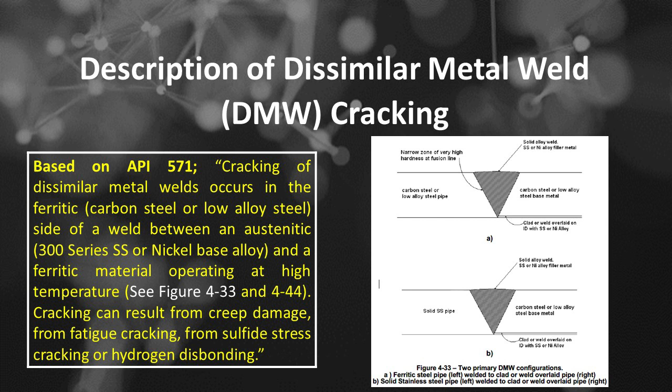Dissimilar metal weld, or DMW, cracking damage refers to a failure mechanism that can occur at the junction of two different types of metals that have been welded together. This issue is particularly prevalent in applications involving high-temperature and high-pressure environments, such as in power plants, refineries, and nuclear facilities.

Characteristics of dissimilar metal weld cracking. Number 1 is material differences. Dissimilar metal weld often involves joining a ferrous metal, such as carbon steel or low alloy steel, with a non-ferrous metal, such as stainless steel or nickel alloys. The differing thermal expansion coefficients, mechanical properties, and chemical compositions of these metals can lead to stress concentrations.

Number 2 is cracking locations. Dissimilar metal weld, or DMW, cracking typically occurs at or near the heat-affected zone, HAZ, or the weld itself, where the microstructure has been altered due to the intense heat from the welding process. Cracking can manifest as transverse cracks, longitudinal cracks, or underbead cracks.

Number 3 is mechanisms of cracking, such as the following. The first is thermal stresses. Discrepancies in cooling rates between the two metal types can induce residual stresses, leading to cracking.

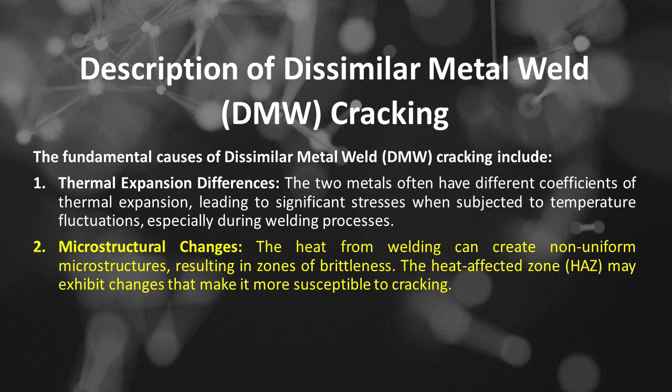Number 2 is microstructural changes. The heat from welding can create non-uniform microstructures, resulting in zones of brittleness. The heat-affected zone, or HAZ, may exhibit changes that make it more susceptible to cracking.

Number 3 is residual stresses. Welding introduces residual stresses in the joint area due to the concentrated heating and rapid cooling involved in the welding process. These stresses can further exacerbate cracking, especially in the presence of tensile loads.

Number 4 is hydrogen embrittlement, often due to the presence of hydrogen in the weld area, exacerbated by the different microstructures of the adjacent metals. Number 5 is composition differences. The difference in alloying elements between the two metals can result in the formation of hard, brittle phases within the weld metal or at the interface, which can initiate cracks.

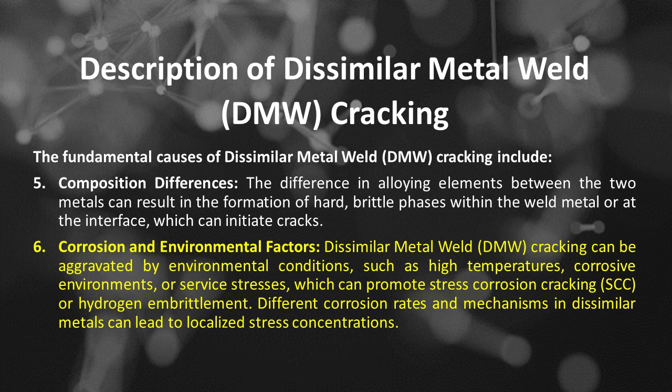Number 6 is corrosion and environmental factors. Dissimilar metal weld, or DMW, cracking can be aggravated by environmental conditions, such as high temperatures, corrosive environments, or service stresses, which can promote stress corrosion cracking, or SCC, or hydrogen embrittlement. Different corrosion rates and mechanisms in dissimilar metals can lead to localized stress concentrations.

The occurrence of dissimilar metal weld, or DMW, cracking is a critical concern in industries like power generation, oil and gas, and petrochemical sectors, where welded joints are subject to rigorous service conditions. It can lead to significant safety hazards, operational downtime, and costly repairs if not properly managed.

Preventive measures include careful selection of welding materials, precise control of welding parameters, and thorough post-weld heat treatments to relieve residual stresses and minimize the likelihood of cracking.

Regular inspection and monitoring of weld integrity are also essential to detect dissimilar metal weld, or DMW, cracking early and address any potential issues proactively.

Dissimilar metal weld, or DMW, affected materials based on API 571: the most common are ferritic materials such as carbon steel and low-alloy steels that are welded to austenitic stainless steels, as well as any material combinations with widely differing thermal expansion coefficients. DMW cracking is a concern in industries that involve welding of different metals, particularly in pressure vessels, piping, and structural components.

The affected materials in dissimilar metal weld, or DMW, cracking typically involve a combination of metal types, often characterized by differences in mechanical properties, thermal expansion coefficients, and metallurgical characteristics. Key affected materials that may be involved include: Number 1, carbon steel.

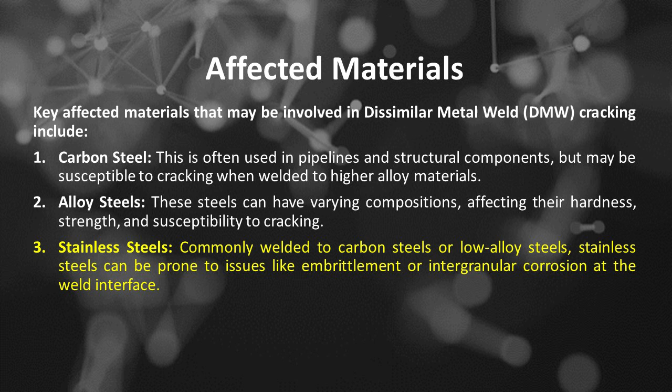Commonly welded to carbon steels or low-alloy steels, stainless steels can be prone to issues like embrittlement or intergranular corrosion at the weld interface. Number 4 is nickel alloys. These are sometimes used in high-temperature or corrosive environments but may create challenges when welded to lower alloy steels due to differing thermal and mechanical properties.

Number 5 is copper alloys. The welding of copper to carbon steel or nickel alloys can lead to significant issues due to differing thermal expansion and conductivity, potentially resulting in cracking.

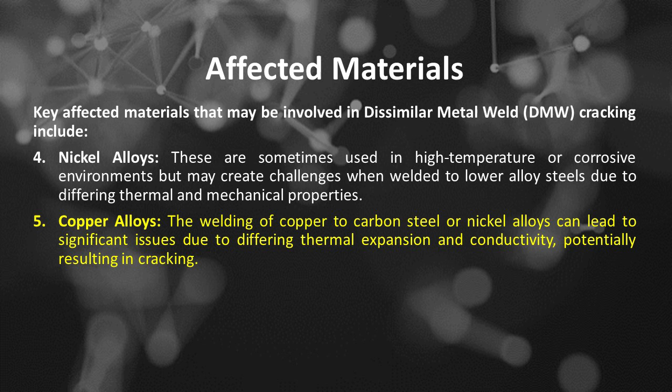Number 6 is cast irons. When cast iron is joined to steel, the brittle nature of cast iron can result in cracking if not properly handled in the welding process.

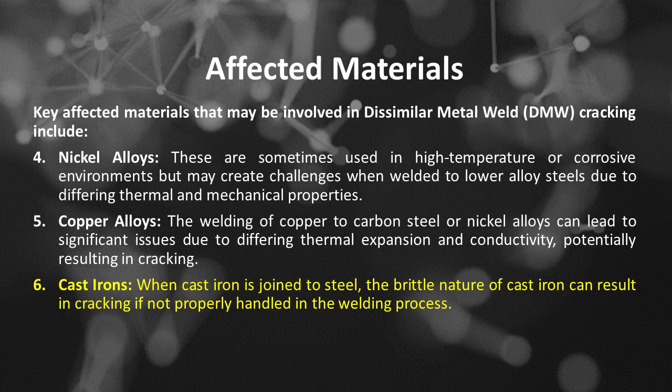Number 7 is welding filler metals. The choice of filler metal is crucial as it must match or be compatible with both base materials, and inappropriate selection can lead to weld cracking due to differences in thermal properties or hydrogen susceptibility.

Number 8 is other dissimilar metals. Various combinations of metals may also lead to specific cracking mechanisms due to differences in weldability and thermal behavior.

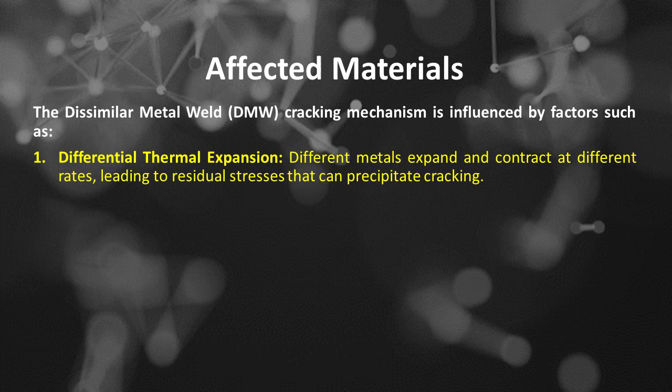The dissimilar metal weld, or DMW, cracking mechanism is influenced by factors such as: Number 1 is differential thermal expansion. Different metals expand and contract at different rates, leading to residual stresses that can precipitate cracking.

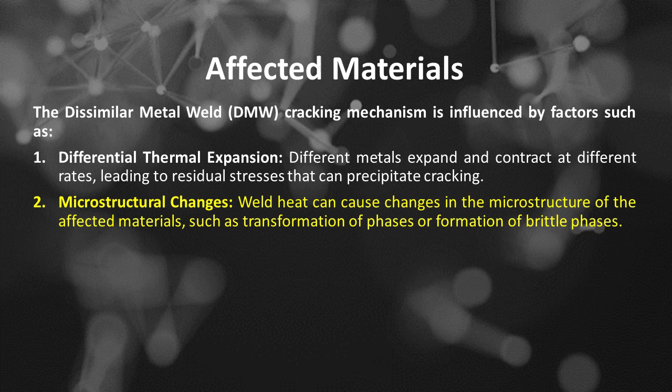Number 2 is microstructural changes. Weld heat can cause changes in the microstructure of the affected materials, such as transformation of phases or formation of brittle phases. Number 3 is strain aging.

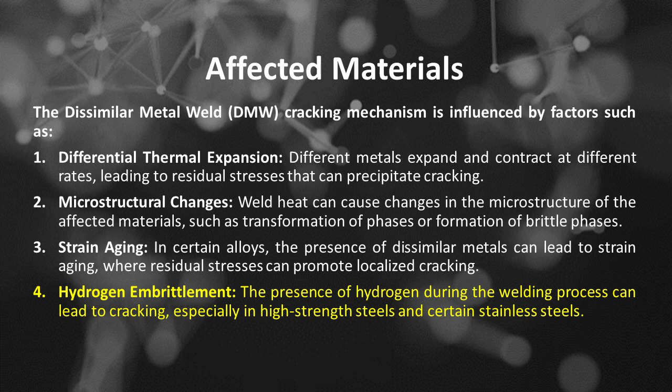In certain alloys, the presence of dissimilar metals can lead to strain aging, where residual stresses can promote localized cracking. Number 4 is hydrogen embrittlement. The presence of hydrogen during the welding process can lead to cracking, especially in high-strength steels and certain stainless steels.

Number 5 is thermal fatigue. Cyclic thermal loading can be more pronounced at the interface of dissimilar metals, leading to fatigue cracking over time.

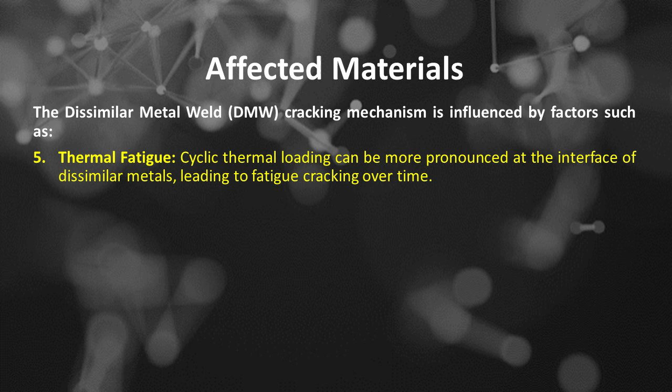Addressing dissimilar metal weld, or DMW, cracking involves careful selection of welding procedures, filler materials, and post-weld heat treatments, as well as thorough inspection and testing to ensure the integrity of the joints.

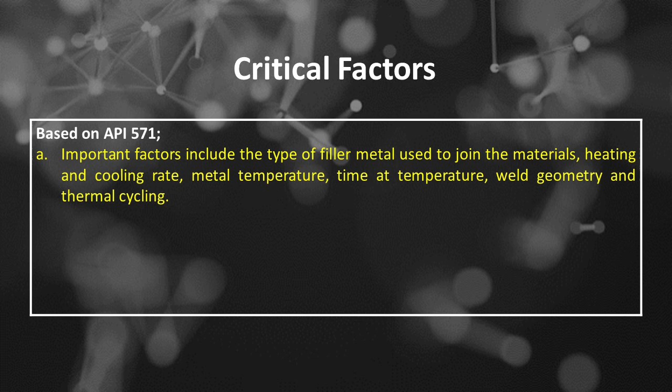Dissimilar metal weld, or DMW, cracking critical factors based on API 571. Important factors include the type of filler metal used to join the materials, heating and cooling rate, metal temperature, time at temperature, weld geometry and thermal cycling.

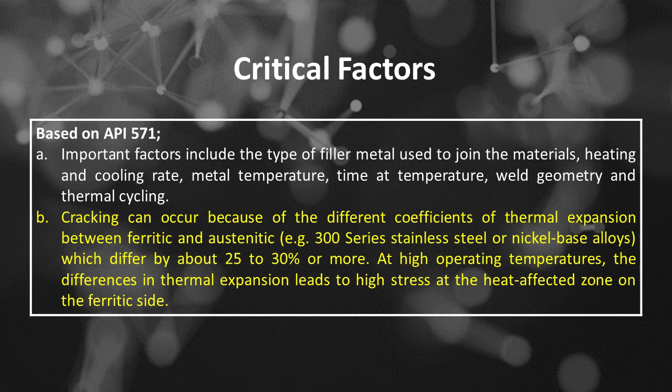The second factor is that cracking can occur because of the different coefficients of thermal expansion between ferritic and austenitic materials, such as 300 series stainless steel or nickel base alloys, which differ by about 25 to 30% or more. At high operating temperatures, the differences in thermal expansion leads to high stress at the heat-affected zone on the ferritic side.

The third factor is as the operating temperature increases, differential thermal expansion between the metals results in increasing stress at the weldment, particularly if a 300 series stainless steel weld metal is used. Ferritic/austenitic joints can generate significant thermal expansion and thermal fatigue stresses at temperatures greater than 510 degrees Fahrenheit, or 260 degrees Celsius.

The fourth factor is thermal cycling aggravates the problem. Stresses during startup and shutdown can be significant. The fifth factor is stresses acting on the weldment are significantly higher when an austenitic stainless steel filler metal is used.

A nickel base filler metal has a coefficient of thermal expansion that is closer to carbon steel, resulting in significantly lower stress at elevated temperatures.

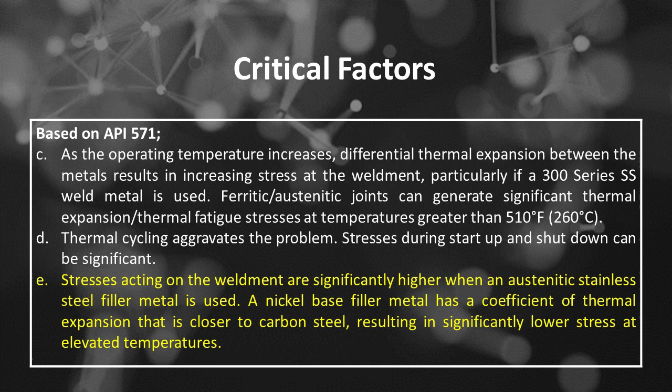The sixth factor is for dissimilar welds that operate at elevated temperatures, the problem is aggravated by the diffusion of carbon out of the heat-affected zone of the ferritic material and into the weld metal. The loss of carbon reduces the creep strength of the ferritic material heat-affected zone, thereby increasing the cracking probability.

The temperature at which carbon diffusion becomes a concern is above 800 degrees Fahrenheit to 950 degrees Fahrenheit, or 427 degrees Celsius to 510 degrees Celsius, for carbon steels and low alloy steels, respectively.

See Figure 4:35, a high magnification photomicrograph of a dissimilar metal weld, or DMW, joining a ferritic alloy, SA213T22, used in high temperature service. Creep cracks, or black specks, can be observed in the ferritic alloy heat-affected zones.

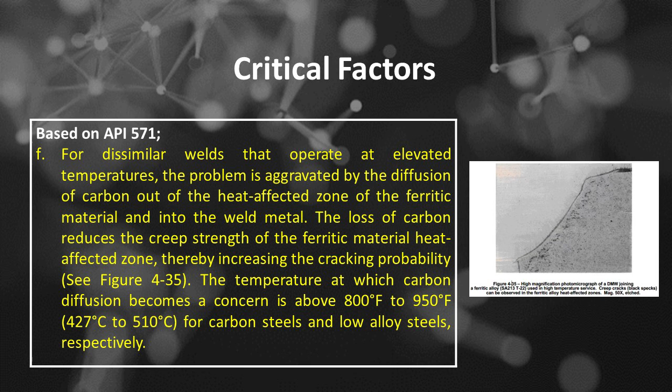Mag. 50X, etched. Dissimilar metal welds on a ferritic steel made with a 300 series SS weld metal or a nickel-based filler metal result in a narrow region, a mixed zone, of high hardness at the toe of the weld, near the fusion line on the ferritic steel side.

These high hardness zones render the material susceptible to various forms of environmental cracking such as sulfide stress cracking or hydrogen stress cracking. PWHT of the weldment will not prevent environmental cracking if the weld is exposed to wet H2S conditions.

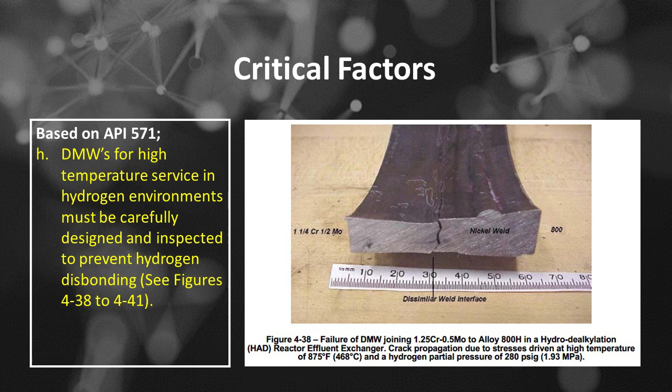Failure of dissimilar metal welds joining 1.25 Cr 0.5 Mo to alloy 800H in a hydrodealkylation, or HAD, reactor effluent exchanger. Crack propagation due to stresses driven at high temperature of 875 degrees Fahrenheit, or 468 degrees Celsius, and a hydrogen partial pressure of 280 psig, or 1.93 MPa.

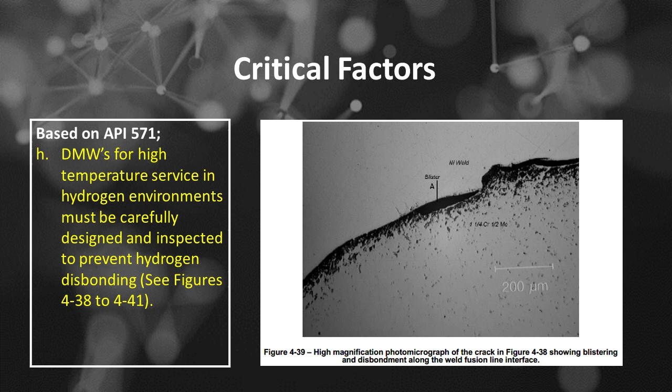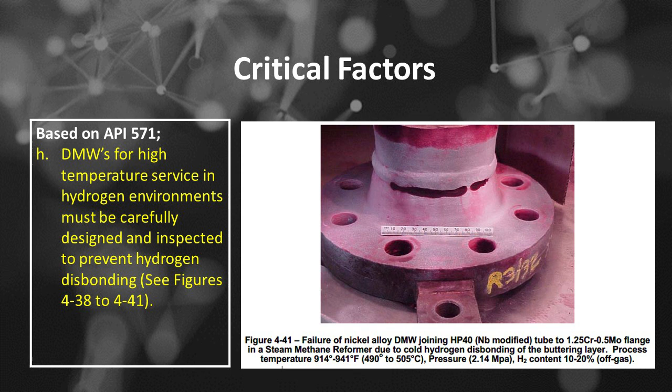See Figure 4:41, failure of a nickel alloy DMW joining HP40, NB modified, tube to 1.25 Cr 0.5 Mo flange in a steam methane reformer due to cold hydrogen disbonding of the buttering layer. Process temperature 914 to 941 degrees Fahrenheit, or 490 to 505 degrees Celsius, pressure 2.14 MPa, H2 content 10 to 20%, off gas.

Dissimilar metal weld, DMW, cracking is a well-documented failure mechanism that can occur at the interface between different types of metals, particularly in structures such as piping in power plants, chemical plants, and oil and gas facilities. Here are some critical factors associated with dissimilar metal weld cracking.

Number 1 is material properties, such as the following. The first is mechanical properties. The yield strength, ductility, and toughness of the parent metals can significantly affect the cracking potential. Dissimilar metals often have differing mechanical properties that can interact adversely.

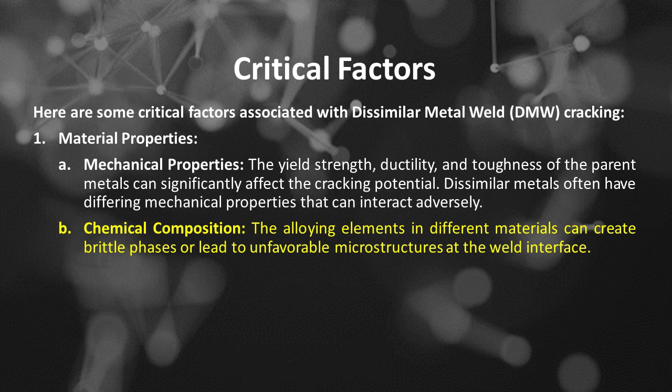The second is chemical composition. The alloying elements in different materials can create brittle phases or lead to unfavorable microstructures at the weld interface.

Number 2 is welding parameters, such as the following. The first is heat input. The amount of heat introduced during welding can influence the cooling rates and microstructures of the weld and heat-affected zones, HAZ. Higher heat inputs can lead to larger grain sizes and potentially more brittle phases forming.

The second is welding procedure. The technique and processes used, including the type of filler material, can affect the metallurgical characteristics of the weld.

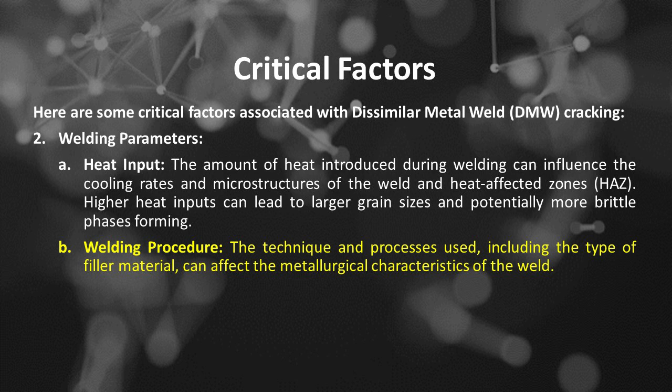Number 3 is thermal stress and residual stress, such as the following. The first is thermal cycles. The thermal expansion and contraction during and after welding can induce residual stresses, which may drive cracking.

The second is brittle phase formation. The localized thermal effects can lead to the formation of brittle intermetallic compounds, which are more susceptible to cracking under stress. Number 4 is microstructural factors, such as the following.

The first is weld microstructure. The interaction between different microstructures at the fusion boundary can lead to weak spots. For example, austenitic stainless steel welded to carbon steel might form brittle intermetallic compounds like Fe-Cr or Ni-Fe phases.

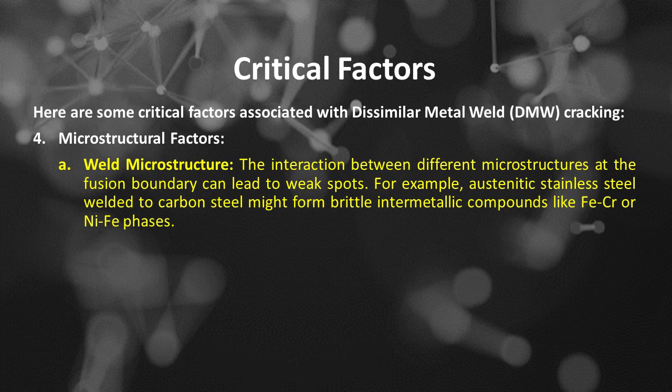The second factor is heat-affected zone, or HAZ, properties. The properties of the HAZ can significantly influence the likelihood of cracking, especially if embrittlement occurs.

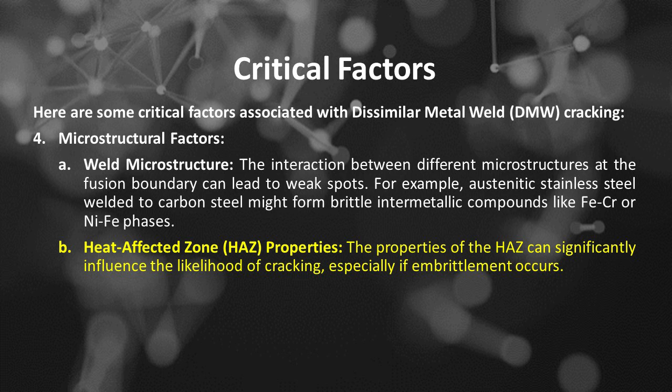Number 5 is environmental conditions, such as corrosive environments. Dissimilar metal welds, or DMWs, may be more susceptible to stress corrosion cracking, or SCC, if they operate in hostile environments, like high temperature or corrosive media.

The second is operating temperature and pressure. Elevated temperatures can enhance diffusion rates, accelerating embrittlement processes.

Number 6 is design factors, such as geometric constraints. The design of the weld joint, including the fit-up and joint design, can influence stress concentrations and the potential for cracking. The second is service conditions.

The operational conditions, including thermal cycling, mechanical loading, and chemical exposure, can play a significant role in the initiation and propagation of cracks. Number 7 is post-weld heat treatment, or PWHT.

Properly designed post-weld heat treatment, PWHT, can help relieve residual stresses and transform microstructures to enhance ductility, thereby reducing the risk of cracking.

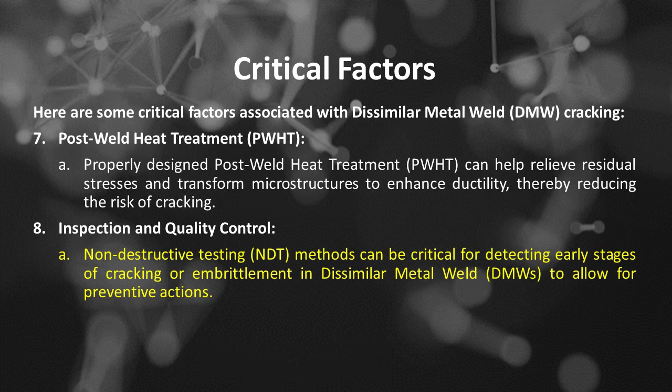Number 8 is inspection and quality control. Non-destructive testing, or NDT, methods can be critical for detecting early stages of cracking or embrittlement in dissimilar metal welds, DMWs, to allow for preventive actions.

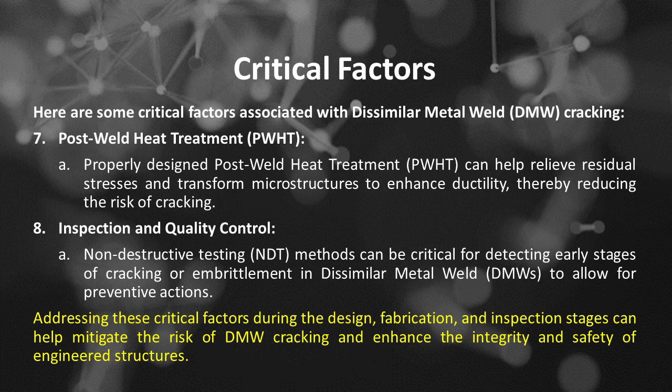Addressing these critical factors during the design, fabrication, and inspection stages can help mitigate the risk of DMW cracking and enhance the integrity and safety of engineered structures.

Dissimilar metal weld damage mechanisms affect units or equipment based on API 571. First, dissimilar metal welds are utilized in special applications in refineries and other process plants. Examples of dissimilar metal welds, or DMWs, include welds used to join clad pipe in locations such as

transitions in hydroprocessing reactor outlet piping from overlaid low alloy CrMo nozzles or piping to solid 300 series stainless steel pipe.

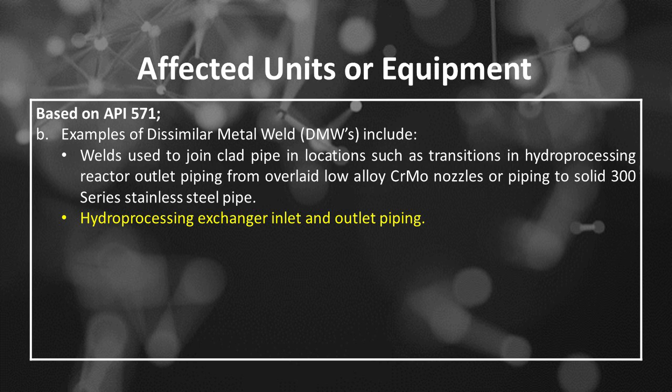Hydroprocessing exchanger inlet and outlet piping. Alloy transitions inside fired heaters, such as 9Cr to 317L in a crude furnace.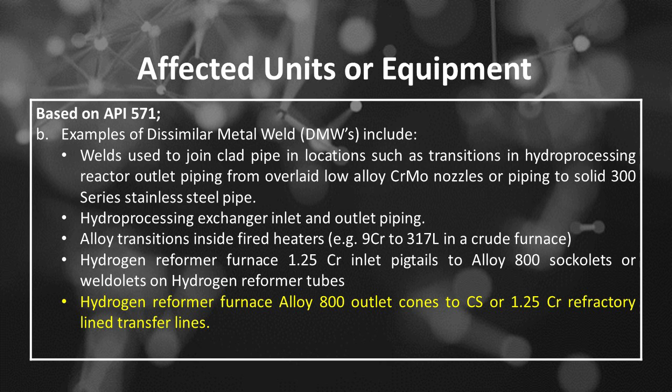Hydrogen reformer furnace 1.25 CR inlet pigtails to alloy 800 sockolets or weldolets on hydrogen reformer tubes. Hydrogen reformer furnace alloy 800 outlet cones to CS or 1.25 CR refractory-lined transfer lines.

Alloy transitions inside fired heaters, e.g., 9CR to 317L in a crude or vacuum furnace.

Welds joining clad pipe sections to themselves or to unclad carbon or low alloy steel pipe, such as alloy C276 clad CS piping in a crude unit overhead system.

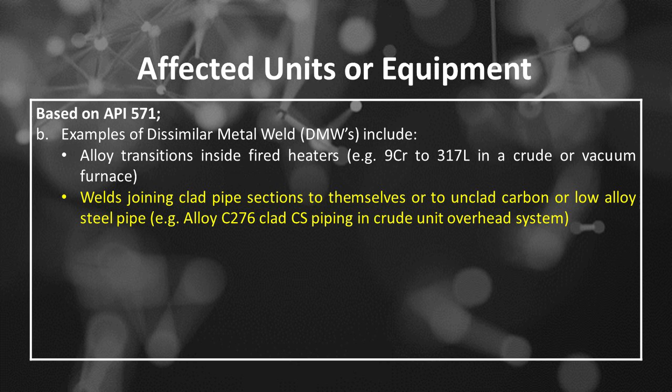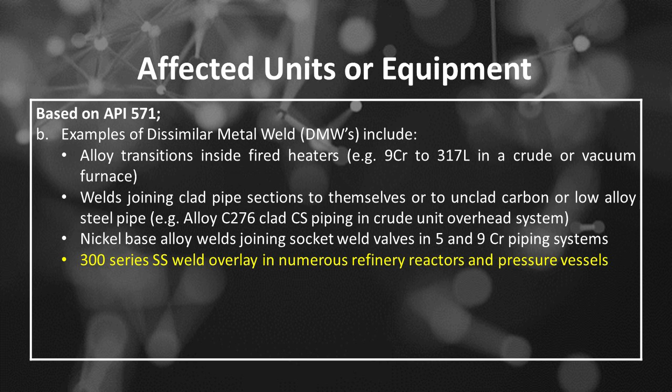Nickel base alloy welds joining socket weld valves in 5 and 9 CR piping systems. 300 series SS weld overlay in numerous refinery reactors and pressure vessels. Similar dissimilar metal welds, or DMWs, have been used in FCCU reactors and regenerator vessels and in coker units.

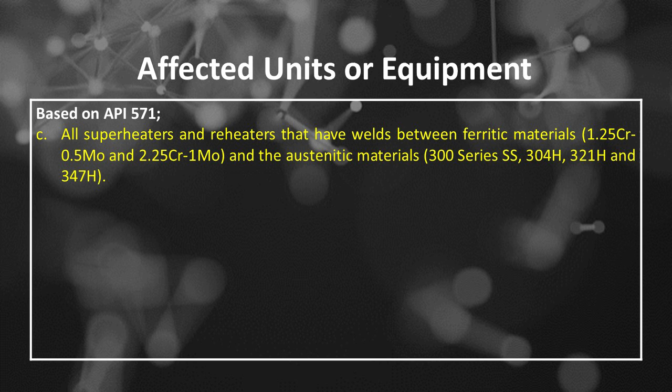The third example is all superheaters and reheaters that have welds between ferritic materials, 1.25 CR 0.5 MO and 2.25 CR 1 MO, and the austenitic materials, 300 series SS, 304H, 321H and 347H.

Dissimilar metal weld, DMW, cracking is a significant damage mechanism primarily associated with the welding of dissimilar metals, such as those typically found in power generation and chemical processing industries.

The most affected units or equipment typically include: number 1, piping systems. These often consist of carbon steel or low alloy steel connected to stainless steel components. The welded joints between dissimilar metals can be prone to cracking.

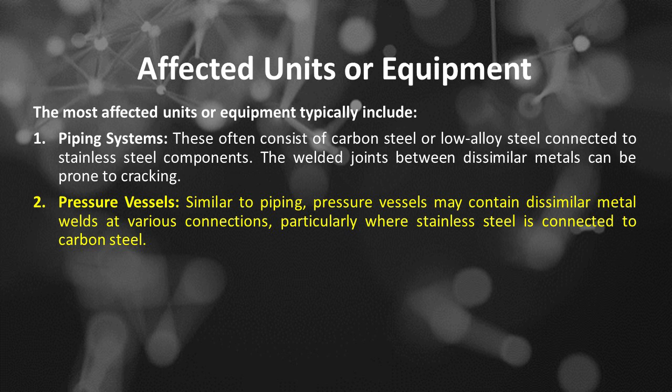Number 2 is pressure vessels. Similar to piping, pressure vessels may contain dissimilar metal welds at various connections, particularly where stainless steel is connected to carbon steel. Number 3 is heat exchangers.

The joints between different metal types in heat exchangers, especially those using stainless steel and carbon steel, can be susceptible to dissimilar metal weld, DMW, cracking. Number 4 is boilers. Dissimilar welds can occur in boiler components where different materials are used, leading to cracking issues under high temperatures and pressures.

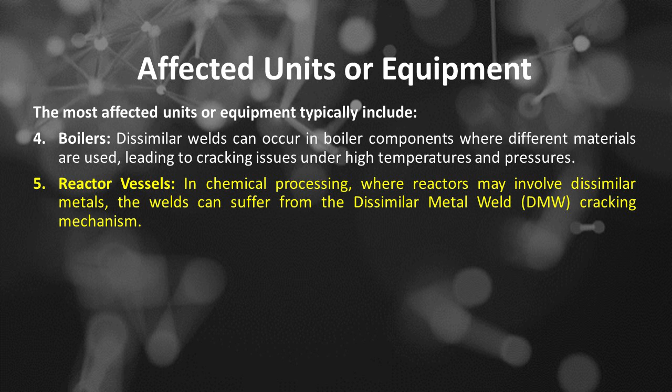Number 5 is reactor vessels. In chemical processing, where reactors may involve dissimilar metals, the welds can suffer from the dissimilar metal weld, DMW, cracking mechanism. Number 6 is turbines and rotating equipment.

The interface between dissimilar materials in turbine components can also be affected, particularly in sections where different metals are joined to optimize properties like corrosion resistance or strength.

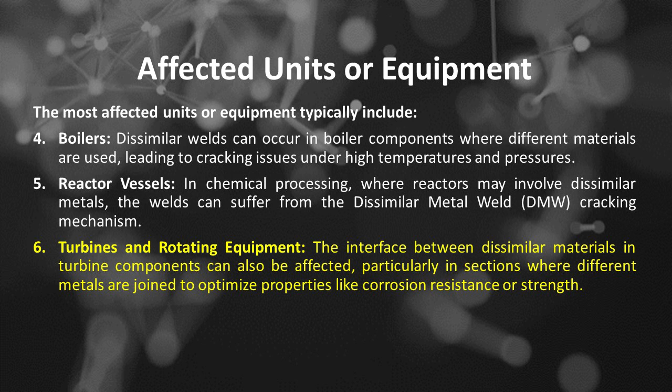Number 7 is nuclear power plant components. Dissimilar metal welds are particularly a concern in nuclear applications, where the combination of high-stress environments and dissimilar materials can exacerbate cracking. Number 8 is heat transfer and separators.

Equipment such as fin-fan coolers, separated by diverse metal types, are also potential sites for dissimilar metal weld, DMW, cracking. Number 9 is high-temperature equipment.

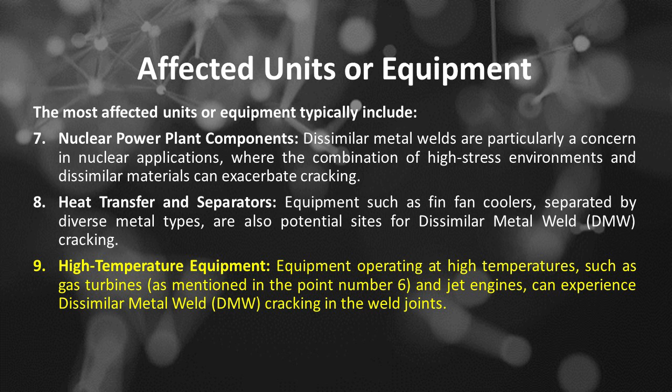Equipment operating at high temperatures, such as gas turbines, as mentioned in point number 6, and jet engines, can experience dissimilar metal weld, DMW, cracking in the weld joints. Number 10 is desalination plants.

The weld joints in equipment used in desalination plants, such as those made of dissimilar metals, can be affected by dissimilar metal weld (DMW) cracking. Factors contributing to dissimilar metal weld cracking include the following.

Number 1 is differences in thermal expansion and contraction between dissimilar metals. Number 2 is differences in mechanical properties, including yield strength and hardness. Number 3 is environmental factors such as corrosion and stress concentrations.

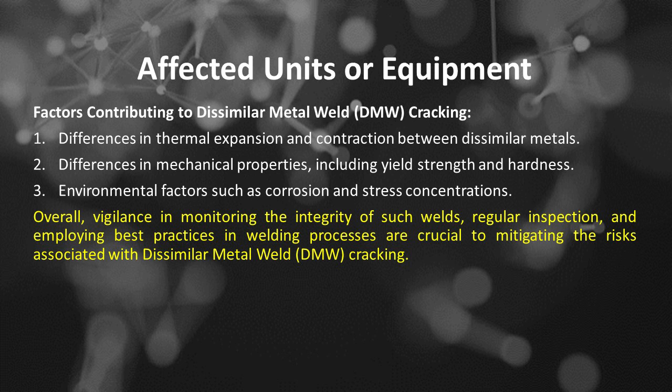Overall, vigilance in monitoring the integrity of such welds, regular inspection, and employing best practices in welding processes are crucial to mitigating the risks associated with dissimilar metal weld cracking.

Appearance or morphology of dissimilar metal welds damage mechanisms based on API 571. In most cases, the cracks form at the toe of the weld in the heat-affected zone of the ferritic material.

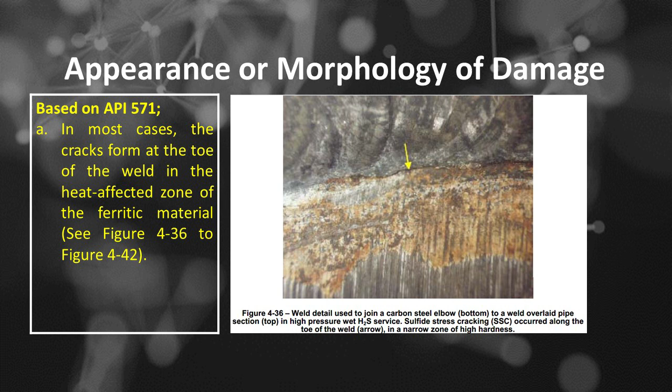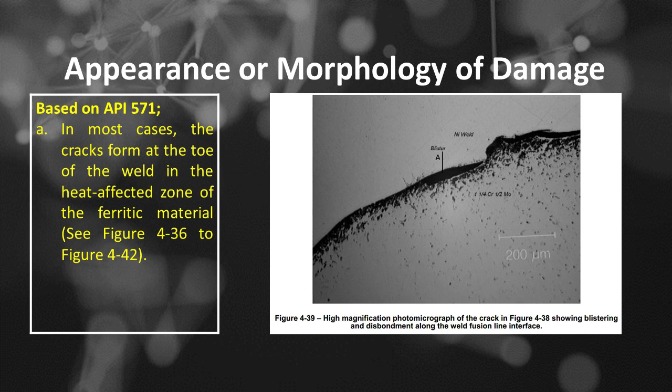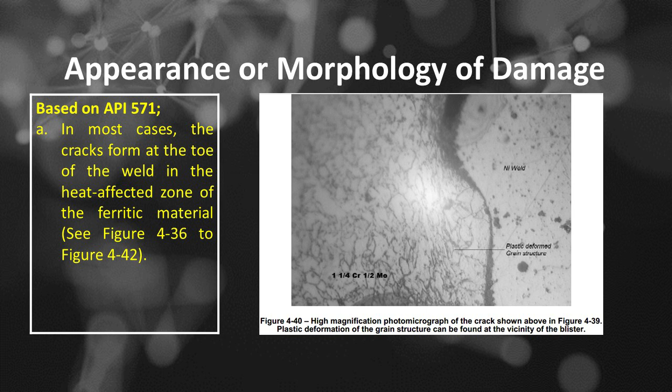See Figure 4-39, high magnification photomicrograph of the crack in Figure 4-38 showing blistering and disbondment along the weld fusion line interface. See Figure 4-40, high magnification photomicrograph of the crack shown above in Figure 4-39. Plastic deformation of the grain structure can be found in the vicinity of the blister.

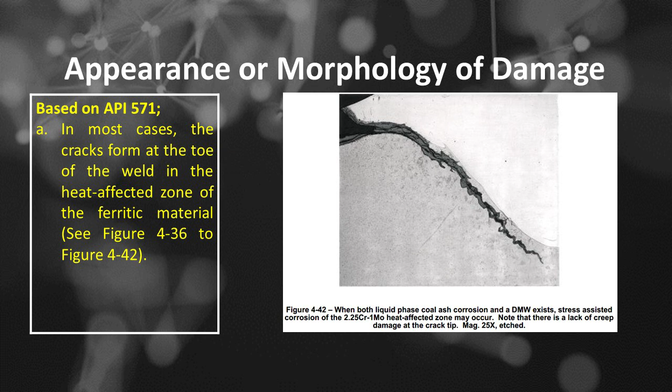See Figure 4-42, when both liquid phase coal ash corrosion and a DMW exist, stress-assisted corrosion of the 2.25 Cr 1 Mo heat-affected zone may occur. Note that there is a lack of creep damage at the crack tip. Magnification 25X, etched.

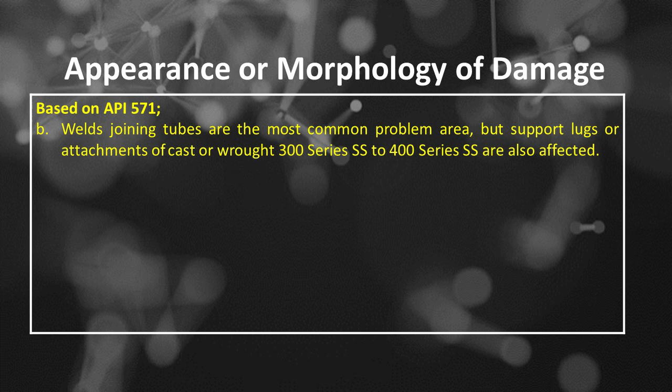The second aspect of appearance or morphology of dissimilar metal damage welds based on API 571: welds joining tubes are the most common problem area, but support lugs or attachments of cast or wrought 300 series stainless steel to 400 series stainless steel are also affected.

Dissimilar metal weld (DMW) cracking is a type of damage mechanism that can occur at the interface between two different types of metals joined by welding. The appearance or morphology of DMW cracking can be characterized by several features.

Number 1 is crack location. Dissimilar metal weld cracking typically occurs at the weld toe or heat-affected zone (HAZ), where there is a transition between the two dissimilar metals. This is often where thermal stresses and metallurgical differences are most pronounced.

Number 2 is crack propagation. The cracks can initiate at the weld interface and propagate either towards the base materials or along the interface. The direction of crack propagation may vary depending on the material properties and environmental conditions.

Number 3 is crack shape. Dissimilar metal weld cracks can appear as narrow, linear fissures and may be straight or exhibit branching. The surface of the cracks can be relatively smooth but may show signs of secondary cracking or tearing.

Number 4 is different crack types. Common types of cracking observed in DMW include the first, heat-affected zone (HAZ) cracking. This type of cracking often occurs due to residual stresses and microstructural changes in the heat-affected zone.

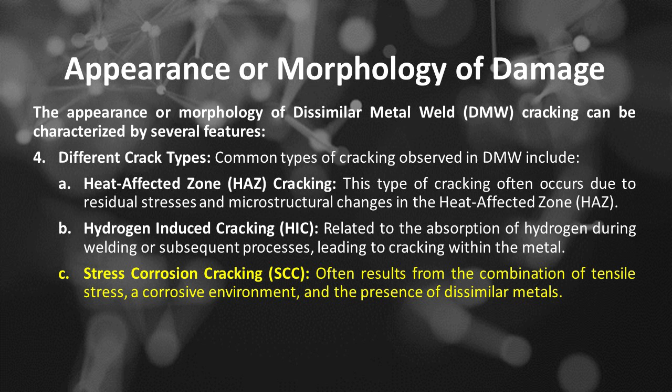The second is hydrogen-induced cracking (HIC), related to the absorption of hydrogen during welding or subsequent processes, leading to cracking within the metal. The third is stress corrosion cracking (SCC), often resulting from the combination of tensile stress, a corrosive environment, and the presence of dissimilar metals.

Number 5 is surface features. The surface of the cracks may exhibit distinct features due to the combination of the two materials' mechanical properties. For instance, cracks may show features typical of both ductile and brittle fracture, such as dimples from ductile tearing or shiny, flat surfaces from brittle fracture.

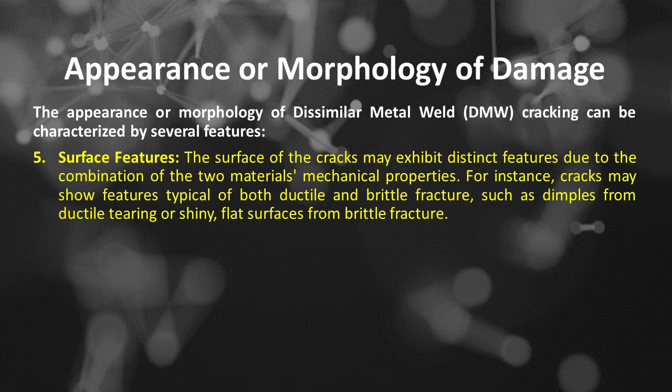Number 6 is intergranular versus transgranular. Cracking can be intergranular, following the grain boundaries of the metals, or transgranular, cutting through the grains themselves. The type of crack can depend on the service conditions and material properties.

Number 7 is edge and root cracking. Cracking may also occur at the edges and root of the weld, which can compromise the integrity of the joint. Number 8 is discoloration and oxidation.

Areas surrounding the cracks may show signs of oxidation or discoloration due to high temperatures during welding and subsequent exposure to environmental factors. Number 9 is dimensional characteristics. The cracks may vary significantly in width and depth, influenced by the welding process, the materials involved, and the level of stress or strain experienced in service.

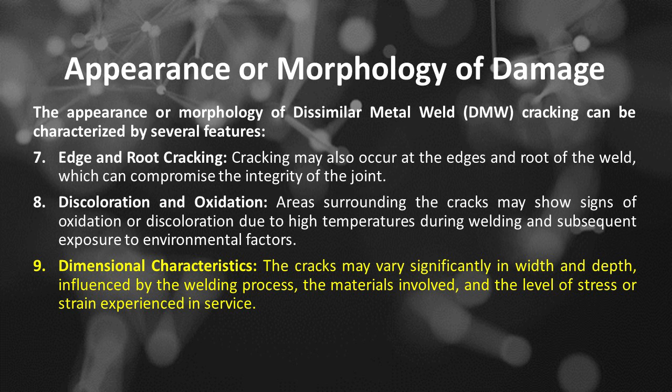Overall, the appearance of dissimilar metal weld, DMW, cracking is influenced by the properties of the dissimilar metals, the welding process, and the operational environment. As such, detailed examination through microscopy or non-destructive testing methods may be required for accurate characterization.

DMW damage prevention and mitigation based on API 571.

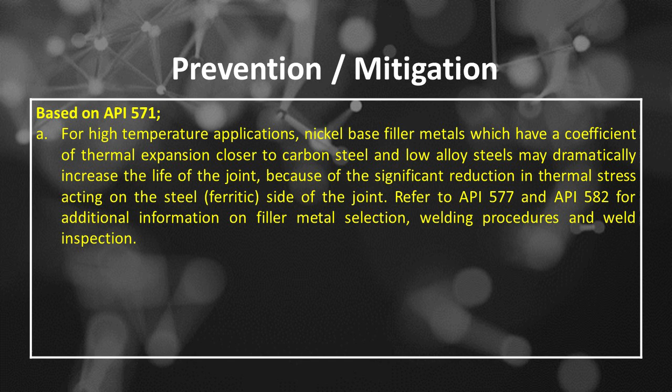The first is for high-temperature applications. Nickel-based filler metals, which have a coefficient of thermal expansion closer to carbon steel and low-alloy steels, may dramatically increase the life of the joint, because of the significant reduction in thermal stress acting on the steel, ferritic, side of the joint. Refer to API 577 and API 582 for additional information on filler metal selection, welding procedures and weld inspection.

The second is if 300 series SS welding electrodes are used, the dissimilar metal weld should be located in a low-temperature region. The third is consider buttering the ferritic side of the joint with the SS or nickel-based filler metal and perform PWHT prior to completing the DMW to minimize the hardness of the mixed weld zone in order to minimize susceptibility to environmental cracking.

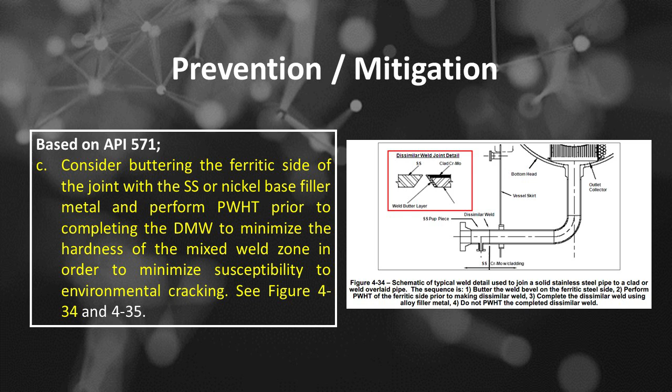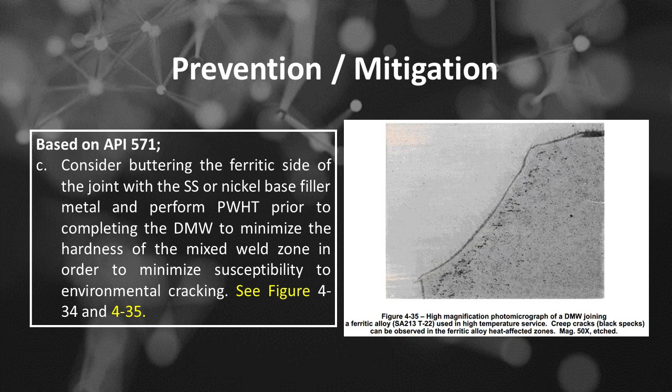Figure 4.35, high magnification photomicrograph of a DMW joining a ferritic alloy, SA213T22, used in high temperature service. Creep cracks, black specks, can be observed in the ferritic alloy heat affected zones. Mag 50X, etched. The fourth is on buttered joints. The thickness of the weld metal should be a minimum of 0.25 inch, 6.35 mm, after the bevel is machined.

Figure 4.35, high magnification photomicrograph of a DMW joining a ferritic alloy, SA213T22, used in high temperature service. Creep cracks, black specks, can be observed in the ferritic alloy heat affected zones. Mag 50X, etched. The fifth is in steam generating equipment.

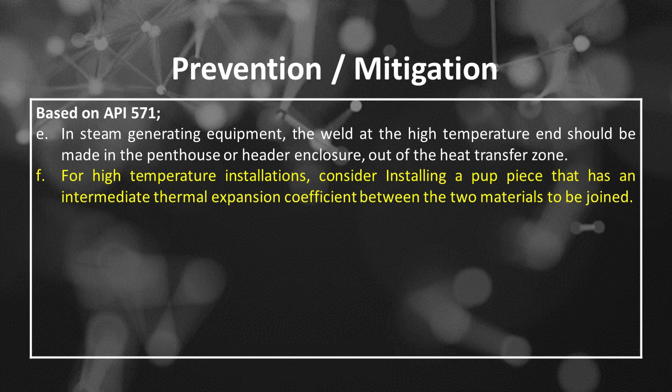The weld at the high temperature end should be made in the penthouse or header enclosure, out of the heat transfer zone. The sixth is for high temperature installations. Consider installing a pup piece that has an intermediate thermal expansion coefficient between the two materials to be joined.

Dissimilar metal weld cracking can pose significant challenges, especially in industries such as nuclear, petrochemical, and power generation, where components made from different materials are joined. These welds can suffer from cracking due to differences in thermal expansion, mechanical properties, and corrosion resistance.

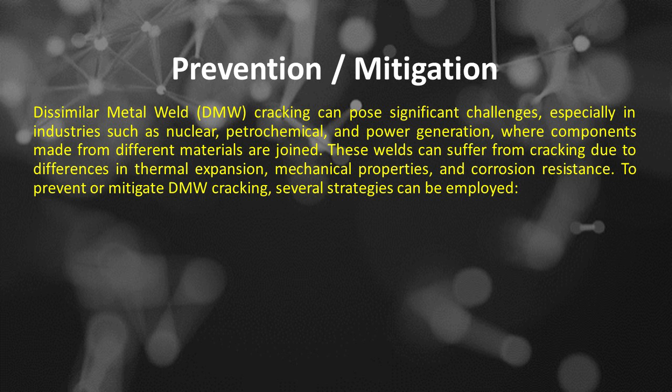To prevent or mitigate dissimilar metal weld cracking, several strategies can be employed. Prevention and mitigation strategies for dissimilar metal weld cracking. Number 1 is material selection, including: the first is choose compatible materials for welding that have similar thermal expansion coefficients, mechanical properties, and corrosion resistance. The second is use filler materials specifically designed for dissimilar metal welding to reduce the likelihood of cracking.

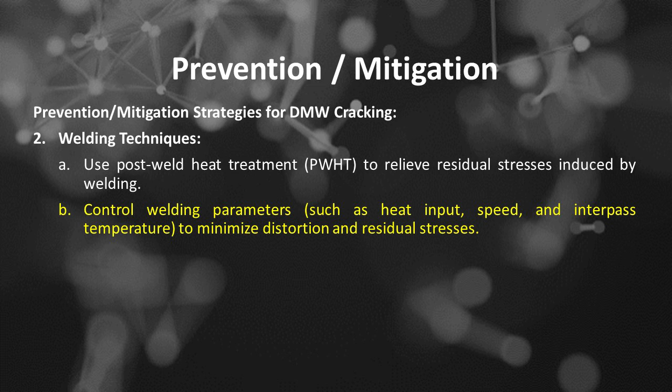Number 2 is welding techniques, including: the first is use post-weld heat treatment, or PWHT, to relieve residual stresses induced by welding. The second is control welding parameters, such as heat input, speed, and interpass temperature, to minimize distortion and residual stresses. The third is opt for welding processes that produce lower heat input, such as laser welding or plasma arc welding.

Number 3 is weld design, including: the first is design joints to minimize stress concentrations. Use wider grooves and adequate dimensions that accommodate thermal expansion. The second is ensure a proper fit-up to prevent gaps which can lead to incomplete fusion or other defects.

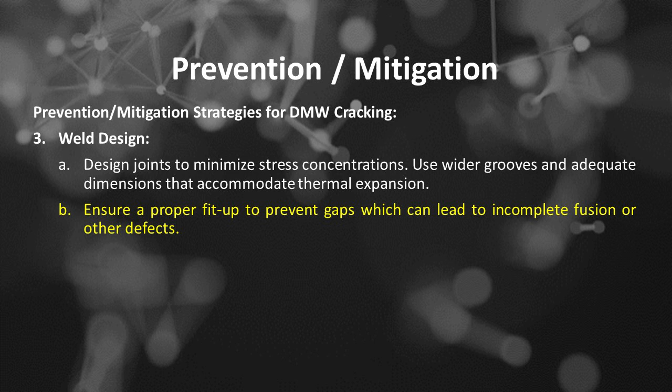Number 4 is pre-weld preparation, including: the first is thoroughly clean the base materials to remove any contaminants, oils, or oxides. The second is consider using a preheat procedure if applicable. This can help maintain consistent temperatures throughout the weld.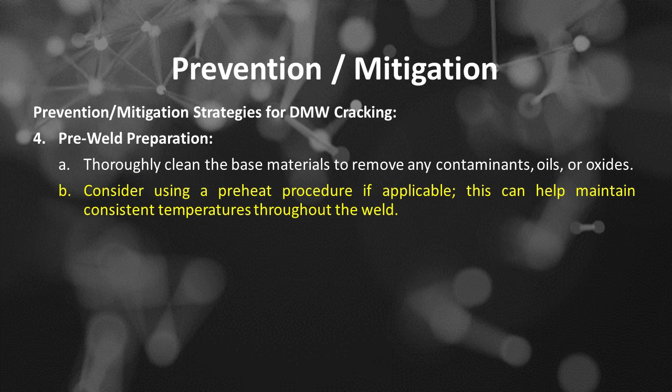Number 5 is monitoring and inspection, including: the first is use non-destructive testing, or NDT, methods such as ultrasonic testing, or UT, or radiographic testing, or RT, to identify cracks or defects in dissimilar metal welds during and after fabrication. The second is regular monitoring of welded joints in service can help detect early signs of failure.

Number 6 is post-weld processing, including: the first is implement PWHT as needed to reduce hardness in areas of a weld that could be susceptible to stress corrosion cracking. The second is use techniques like stress relief grinding on vulnerable areas if applicable.

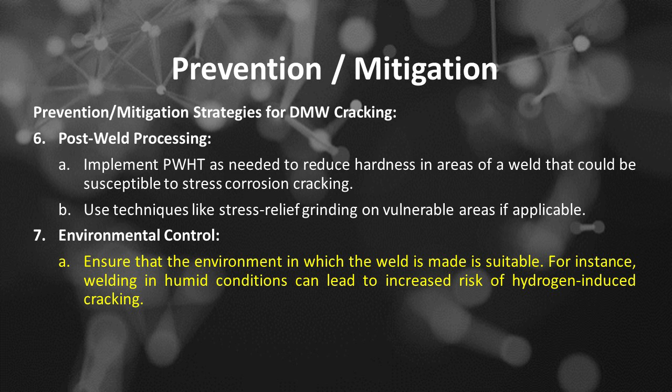Number 7 is environmental control. First, ensure that the environment in which the weld is made is suitable. For instance, welding in humid conditions can lead to increased risk of hydrogen-induced cracking. Second, if appropriate, consider applying protective coatings or corrosion inhibitors.

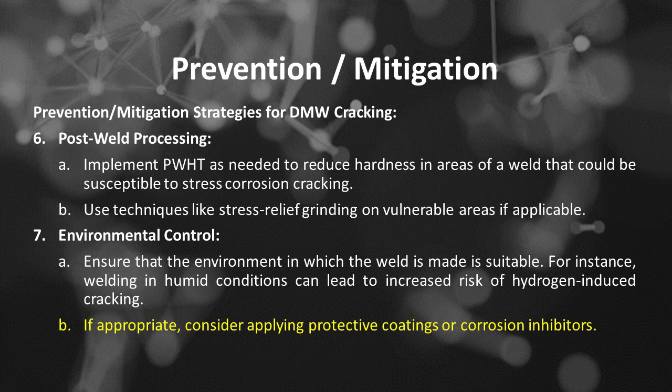Number 8 is training and certification. First, ensure that welders are properly trained and qualified for DMW work. Specific training can help them understand the nuances of welding dissimilar metals and the associated risks.

Number 9 is engineering analysis. Conduct stress analysis to evaluate the effects of operating conditions, thermal cycles, pressure, etc., on welded joints and to ensure the design can withstand expected service conditions. Implementing these strategies can help minimize the risk of dissimilar metal welds cracking and extend the service life of welded components in various high-stress environments.

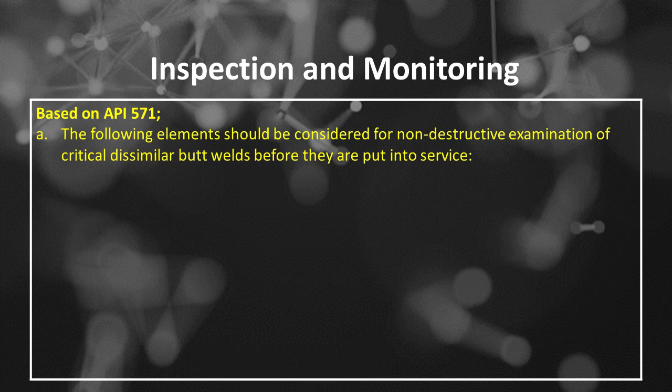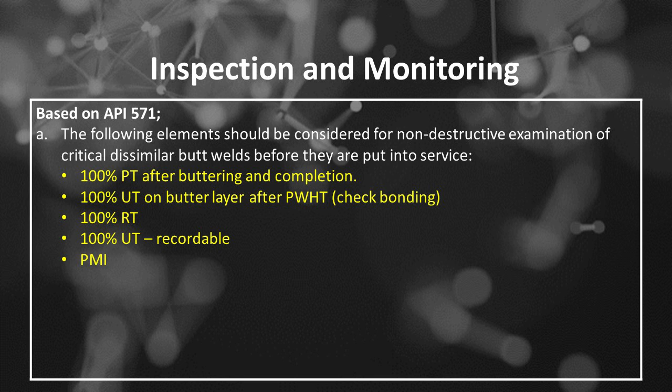Second, for dissimilar welds in fired heater tubes, RT and UT shear wave inspection should be performed. Third, environmental cracking will also result in surface breaking cracks initiating on the ID surface exposed to the corrosive environment, which can be detected using WFMT or external SWUT methods.

Dissimilar metal weld, or DMW, cracking damage refers to the issues that can arise at the junction of two different types of metals that are welded together, commonly seen in applications like piping systems in power plants and refineries. Detecting this type of damage is critical to maintaining structural integrity and safety.

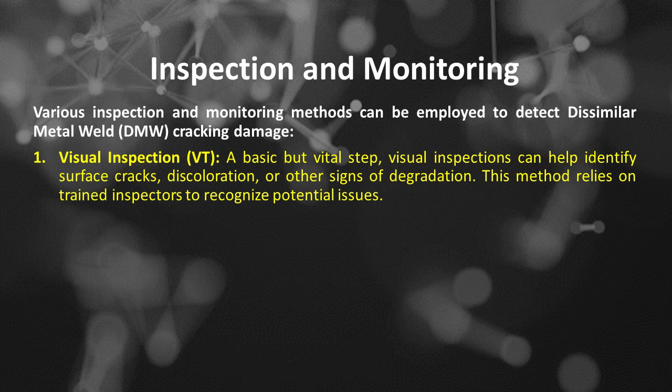Various inspection and monitoring methods can be employed to detect dissimilar metal weld, or DMW, cracking damage. Number 1 is visual inspection, or VT. A basic but vital step, visual inspections can help identify surface cracks, discoloration, or other signs of degradation. This method relies on trained inspectors to recognize potential issues.

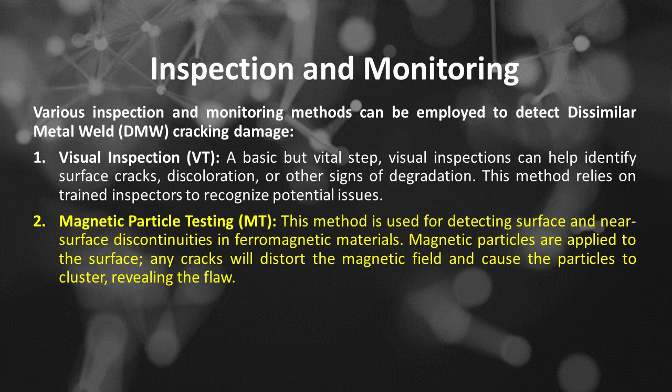Number 2 is magnetic particle testing, or MT. This method is used for detecting surface and near-surface discontinuities in ferromagnetic materials. Magnetic particles are applied to the surface, any cracks will distort the magnetic field and cause the particles to cluster, revealing the flaw. Number 3 is dye penetrant inspection, or PT.

It involves applying a dye to the surface of the weld. The dye penetrates any cracks or defects. After a developing agent is applied, the dye will highlight the cracks under UV or visible light.

Number 4 is ultrasonic testing, or UT. High-frequency sound waves are sent through the material. Reflections off cracks or defects can be detected, providing information about the size and location of flaws, including those in dissimilar metal welds.

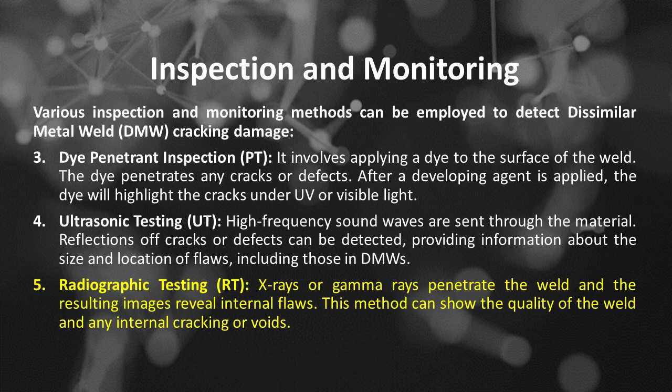Number 5 is radiographic testing, or RT. X-rays or gamma rays penetrate the weld and the resulting images reveal internal flaws. This method can show the quality of the weld and any internal cracking or voids.

Number 6 is eddy current testing, or ECT. Particularly useful for non-ferromagnetic materials, eddy currents induce localized electromagnetic fields that change near cracks or defects. This method is effective for detecting surface and subsurface cracks.

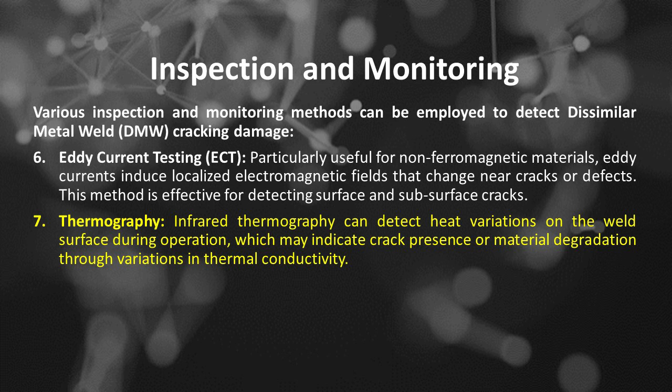Number 7 is thermography. Infrared thermography can detect heat variations on the weld surface during operation, which may indicate crack presence or material degradation through variations in thermal conductivity.

Number 8 is acoustic emission testing, or AET. This method monitors the high-frequency waves produced by crack growth and other changes in the material under stress. It can help detect the onset of cracking in real time.

Number 9 is digital imaging and advanced analysis techniques. Techniques like digital X-ray or high-resolution computed tomography, or CT, can provide more detailed imaging and help in assessing the growth of cracks over time.

Number 10 is fiber optic sensors. These sensors can be embedded or placed near the weld, providing continuous monitoring of strain, temperature, and any changes indicative of cracking. Number 11 is combined methods.

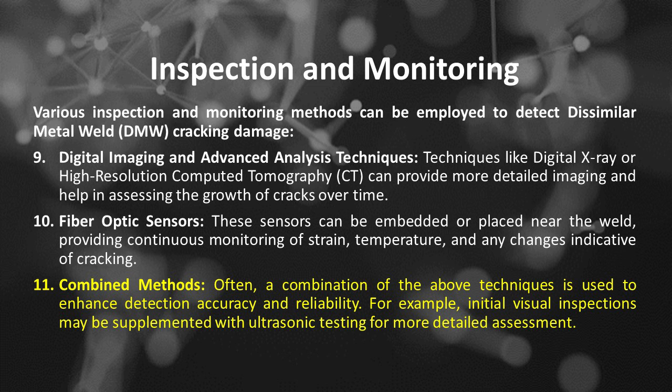Often, a combination of the above techniques is used to enhance detection accuracy and reliability. For example, initial visual inspections may be supplemented with ultrasonic testing for more detailed assessment.

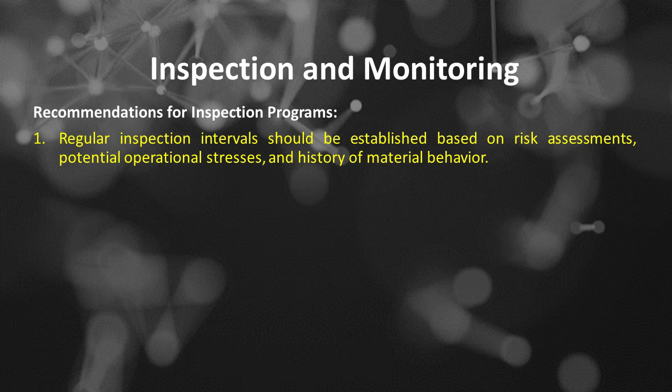Recommendations for inspection programs. Number 1, regular inspection intervals should be established based on risk assessments, potential operational stresses, and history of material behavior. Number 2, employ personnel with proper qualifications and training in inspecting dissimilar metal welds, or DMWs. Number 3, maintain documentation of inspections, findings, and subsequent actions for compliance and tracking potential issues over time.

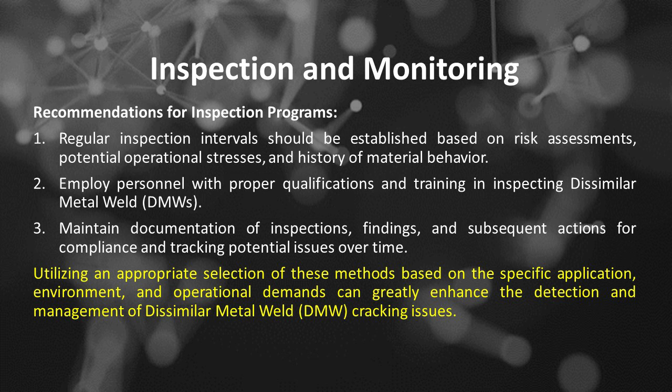Utilizing an appropriate selection of these methods based on the specific application, environment, and operational demands can greatly enhance the detection and management of dissimilar metal weld cracking issues.